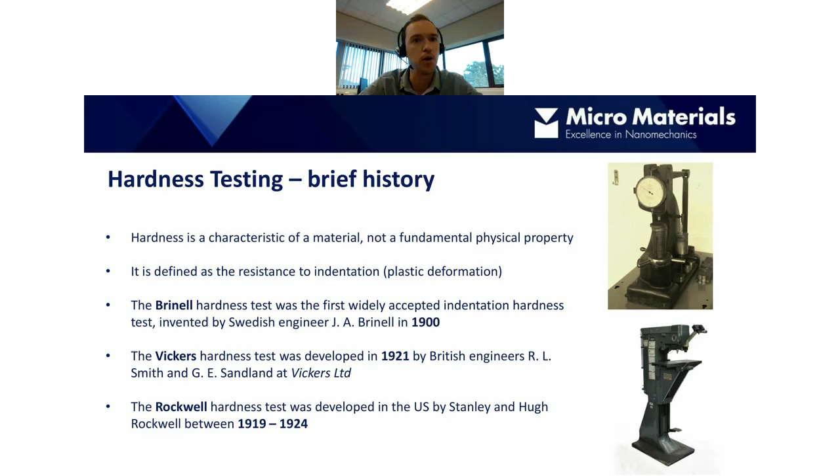Around the same time, the Rockwell hardness test was developed in the United States by Stanley and Hugh Rockwell, who apparently were not related, coincidentally. This test was also developed around the early 1920s.

Let's look in a bit more detail at some of these test techniques, and then we can compare them to modern day nano indentation.

With Vickers indentation, step one is we apply a force through a Vickers indenter, which is a four-sided pyramidal indenter. The force is applied through the indenter into a test specimen, and we get an indentation into the sample. The indenter is pushed into the sample with a known load.

Usually this is between 1 and 100 kilogram force. In terms of newtons, we multiply by 9.8 to get the equivalent force in newtons, so it's roughly 10 to 1,000 newtons.

Step two is to measure the indent. After the indent has taken place, we use the optical microscope to measure the diagonals of the indentation - the two diagonals - and then the average is determined. From that, we can get the surface area of the indentation. Quite simply, the Vickers hardness value is the force divided by the area, which gives us an HV value.

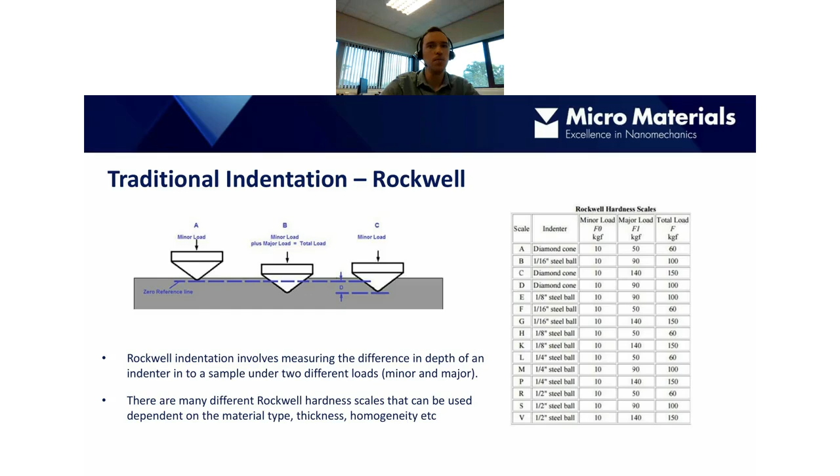All these traditional test techniques, such as Vickers, Brinell, and Rockwell, use very high loads - between 10 and thousands of newtons. The Brinell test is usually 3,000 kilogram force, so 30 kilonewtons, applied through a 10 millimeter diameter tungsten carbide ball. These are very high loads, so we cannot test very small volumes of material, especially thin films and coatings, with these test techniques.

They also do not provide a continuous record of load and depth during the indentation. They're essentially designed to make a big hole, a big indentation into the material, so we don't get a record of depth as the indent progresses. Of course, they only provide a measure of hardness, so we can't really get any other information such as modulus or any time-dependent behavior.

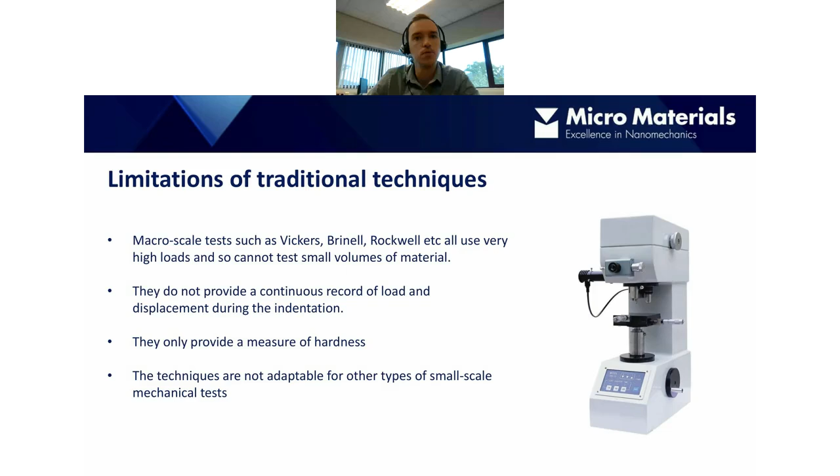And these traditional techniques are not particularly adaptable for other types of small-scale mechanical tests, which I'll describe a bit later on. So why do we use nanoindentation?

Well, the technique was developed in the 1980s to test thin films and coatings. There was an increasing need to characterize the mechanical properties of these coatings, which may be microns thick or even hundreds of nanometers thick. As we described with previous traditional test techniques, the high loads applied would immediately penetrate through any thin film or coating. So we need an indenter with a much smaller, more precise application of these small loads.

So when we're testing coatings in nanoindentation, there's a very general rule you may have heard of. It's called the 10% rule, which means in order to avoid influence from the substrate, the indentation depth should be no more than 10% of the coating thickness. So if we have a 1 micron thick coating, the indentation depth should be no more than 100 nanometers. Obviously that small depth of indentation is not possible with the more traditional test techniques. That rule works quite well for hardness, but it's less applicable to modulus, for reasons we'll discuss later on.

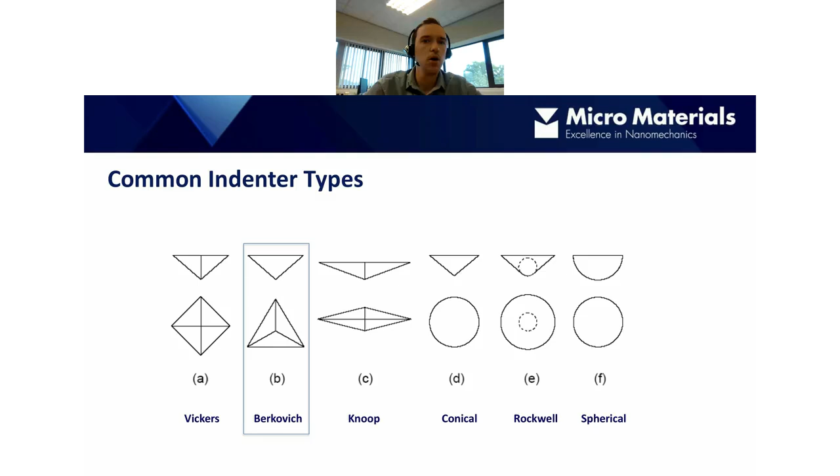So the Berkovich indenter is most commonly used for nanoindentation. It was designed from the outset to have the same ratio of contact area to indentation depth as a Vickers indenter - the geometry, the face angles, were designed to have this equal ratio with the Vickers indenter. Incidentally, it was named after the Russian scientist who devised the geometry, called Berkovich. The reason it's a three-sided rather than a four-sided pyramid is because it's simply easier to grind the diamond to a fine point with three sides compared to four.

If you have a four-sided pyramid, it's hard to get this precise, very sharp tip of the indenter, which is of course very important for nanoindentation testing because some of the indentation depths are very, very small. So the precise geometry of the tip is very important in order to get accurate mechanical property measurements.

Of course, it's not infinitely sharp, not perfectly pointed at the very tip of the indenter. What we usually see is the tip of the indenter is effectively like a small sphere, of radius typically between 20 and 100 nanometers. If it's a brand new indenter, it may be around 20 to 40 nanometers, and then over time that tip will start to round and the effective radius will increase.

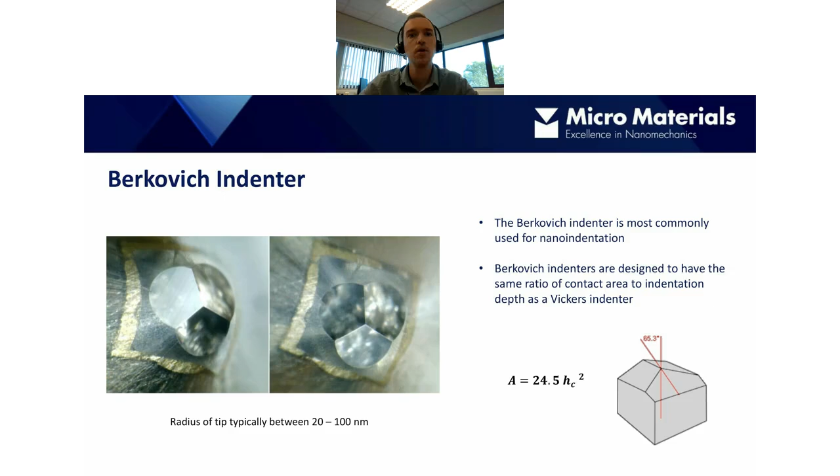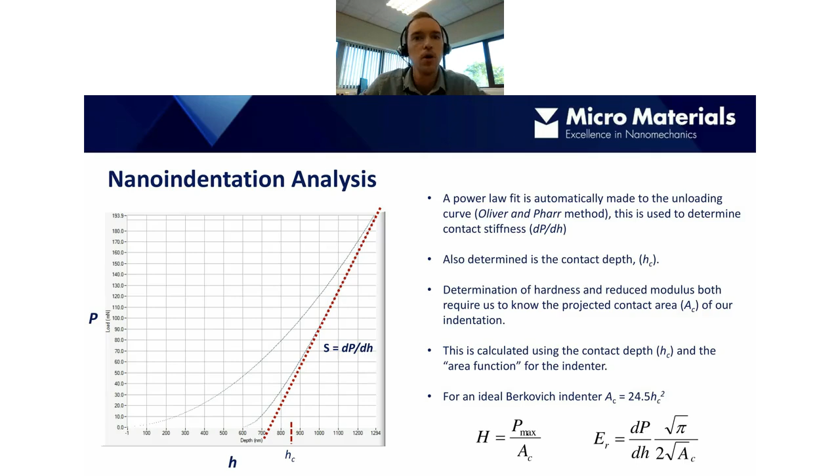In some cases that may be known, in others it may need to be more of an estimate. But from this we can work out the elastic modulus from the reduced modulus, and the software that we provide, the nanotest software, has a function, or a calculator, to convert that for you. In most cases, for low modulus materials, there won't be much difference between the reduced modulus and the elastic modulus.

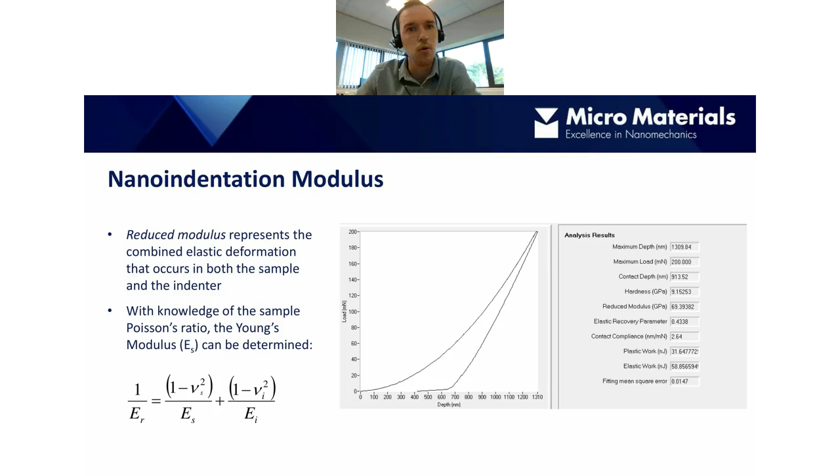We can also, with a nano indenter, detect small changes in the structure of certain materials. For example, if we perform a nano indentation into silicon, we often see small steps in the curve, which are pressure induced phase changes. These can be on the order of 5 or 10 nanometers in magnitude. It really does require a very precise and sensitive nano indenter to detect these features.

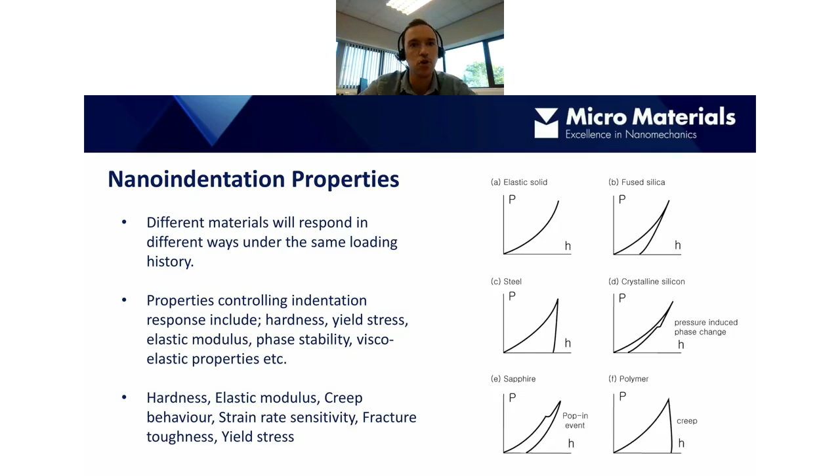We can also obtain plastic and elastic work from the indentation. The area underneath the unloading curve represents the elastic work done by the indenter, and the area enclosed by the loading and unloading curve is the plastic work.

There are a few indexes, such as plasticity index, which is the plastic work divided by the total work, and also the hardness to modulus ratio, simply the hardness divided by the modulus. We can use these indexes or parameters as a useful prediction in terms of tribological behavior from indentation data. My colleague Adrian might talk more about that later on.

Factors that affect nano indentation data are numerous, and I've split them up into 4 general categories - these are just the more common ones. First, we have the environment: vibration, mechanical or acoustic, can affect nano indentation data, as can thermal drift, which is the thermal stability of the instrument. In terms of the instrument itself, frame stiffness or compliance, and indenter geometry.

These are important factors to ensure that we get accurate and reliable mechanical data. Sample preparation - sample mounting, surface roughness - these can affect the data quite a lot. And also properties of the sample itself, so things like indentation size effects, pile up and sink in, and residual stresses. We'll look at these in a bit more detail.

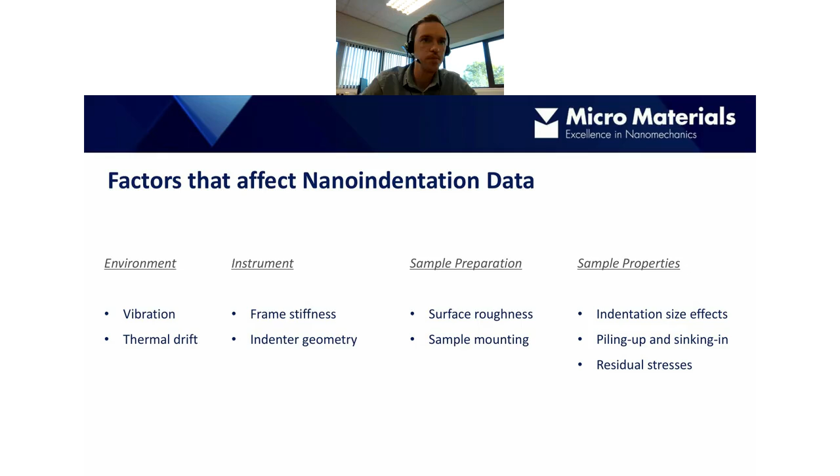First of all, we go back to the environmental considerations. Thermal drift is essentially a change in the dimensions of the instrument due to thermal expansion or contraction of the instrument itself. If the nano indenter is situated in a location where there isn't really any temperature control, we will often see what's called thermal drift on our measurements, which is essentially a change in depth imposed on the indentation data due to this contraction or expansion. Basically, it's an error which we need to try to eliminate or minimize as best we can.

Generally speaking, most nano indenters are housed within some sort of chamber or cabinet. You can see here, this is the NanoTest Vantage, the nano indenter that we make here at Micro Materials, and you can see it's housed in this cabinet. These cabinets can be temperature controlled. For the Nanotest system, if the lab itself is kept temperature constant within 1 or 2 degrees Celsius, then normally we have very, very low rates of thermal drift, so we don't need to worry too much about it.

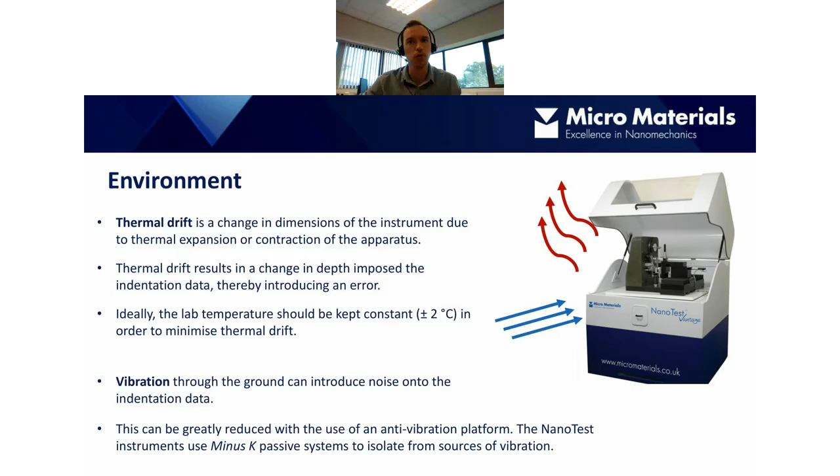It's very important that the frame stiffness value is accurately determined, especially for high modulus materials such as tungsten, because if there's any inaccuracy, it will significantly affect the reliability of the modulus values.

For Nanotest systems, the displacement is directly proportional to the load, which is why we get this straight line, meaning we can use a single value for the frame stiffness across the whole load range. We can do an experiment whereby we perform a range of different loads on the tungsten, and when we analyze the data, we get the correct modulus values across the load range.

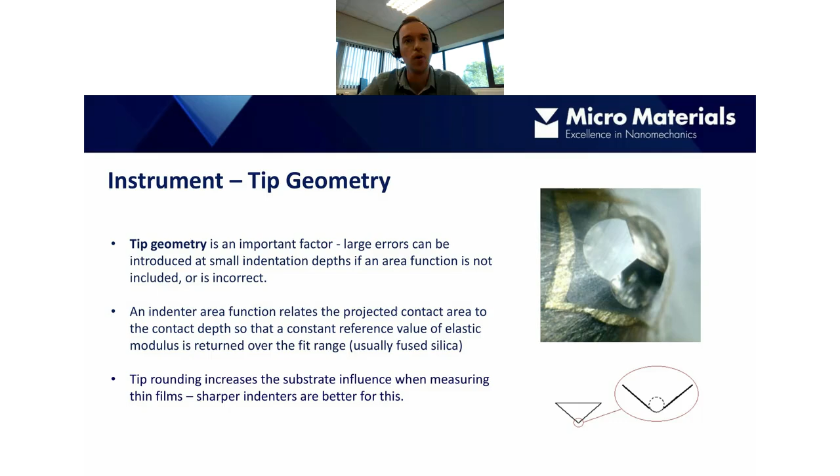Moving on to sample preparation. Surface roughness is a common source of worry - generally speaking, the lower the roughness, the better. When we indent a material with relatively high surface roughness, we tend to see more scatter, more variable indentation curves, and larger standard deviations, or bigger variability in hardness and modulus. If this is the case, in practice we would take more measurements to get a better statistical average. Polishing the samples is preferable as well if possible, although occasionally the act of polishing may change the mechanical properties itself, so it's not always desirable to do that.

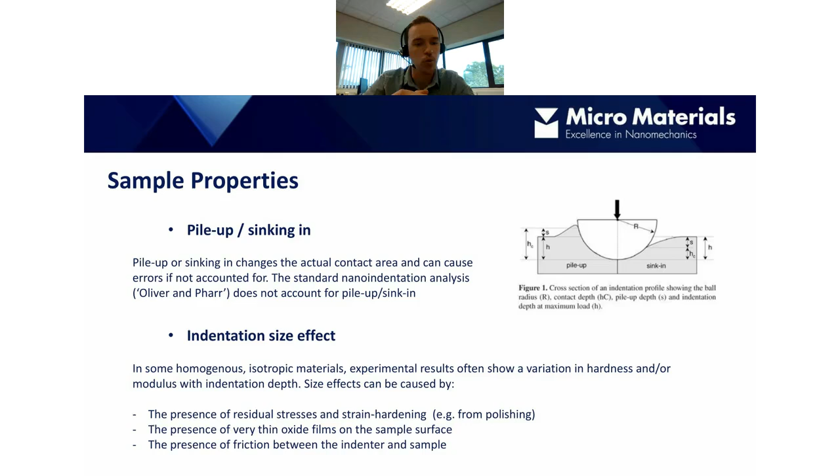There's also indentation size effect. In some materials, we often see an increase in hardness near the surface, which is not due to any errors in indenter geometry or calibration. This can be due to a number of factors, such as the presence of residual stresses, strain hardening from polishing, the presence of a very thin oxide film on the sample surface, or even friction between the indenter and the sample. So as you can see, there are a lot of factors we need to consider when performing nanoindentation.

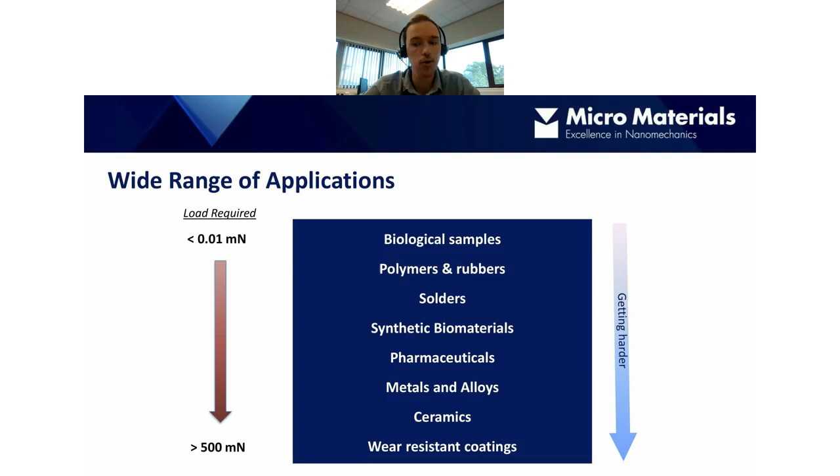In order to accurately measure materials of this hardness and high stiffness, it's important that we have a stable and precisely calibrated instrument. As I mentioned briefly in the section on frame stiffness, any slight error or inaccuracy in the frame stiffness determination will give us large errors in the modulus values. Of course, when indenting materials as hard as this, we need to watch out for indenter wear, especially with samples like this that are very hard and quite rough, such as these synthetic diamond coatings. It can be a bit of an indenter graveyard.

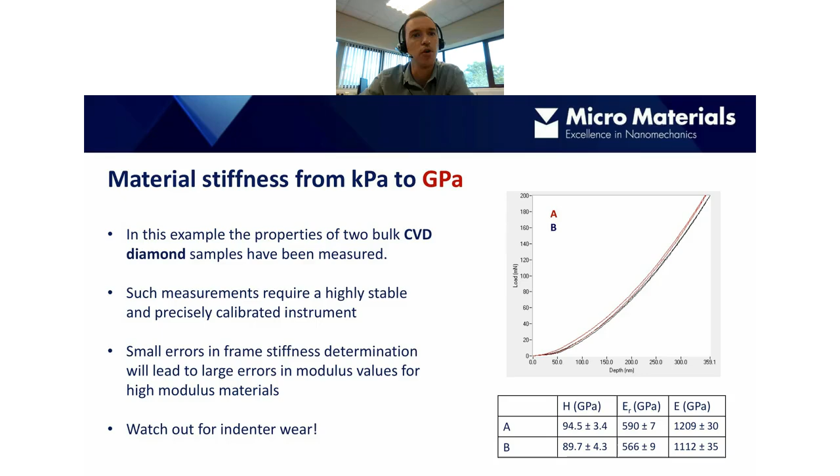Another common application of nanoindentation is to measure mechanical properties as a function of depth. This is particularly useful for coated samples, thin films and coatings. There are different ways we can do this. Often it's done with a load oscillation technique, but it can also be done with a standard quasi-static technique, such as the one you can see here.

This is what we call a multiple load cycle test, whereby we perform an indentation with increasing load steps. The load increases, then we have a partial unload period, and then the load increases onto the next step. This is a single indent in one position on the sample, but with these multiple unload steps. We can use the standard Oliver and Pharr analysis to get a value for hardness or modulus for each of these unloading steps, and then plot that as a function of depth into the sample.

In this example, we have a 2 micron thick titanium nitride coating on a silicon substrate, and we can see the hardness here. We have a peak hardness of around 18 gigapascals in this region.

As the load increases and the depth increases, we get an increasing influence from the silicon substrate, and the hardness then decreases and essentially just tends towards the hardness of the silicon itself.

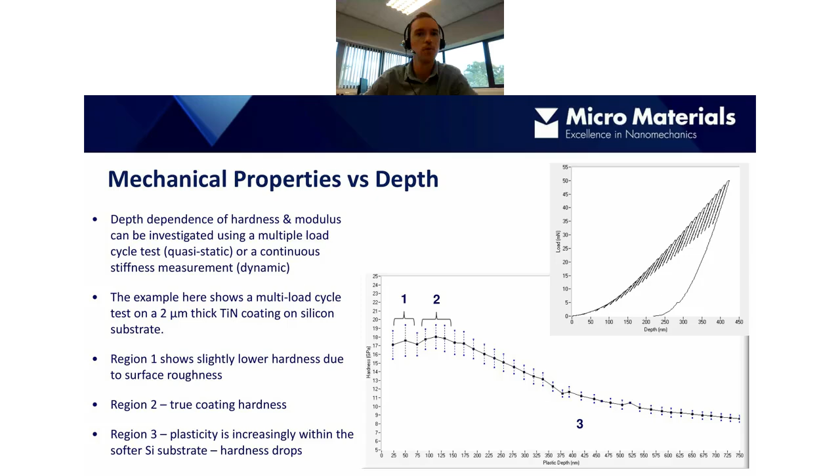Mechanical property mapping is another common application. This is where we perform a large number of indents very quickly over a given area of the sample. The area is typically tens of microns.

That's a useful way of visualizing the variation in mechanical properties graphically. Okay, so creep and viscoelasticity.

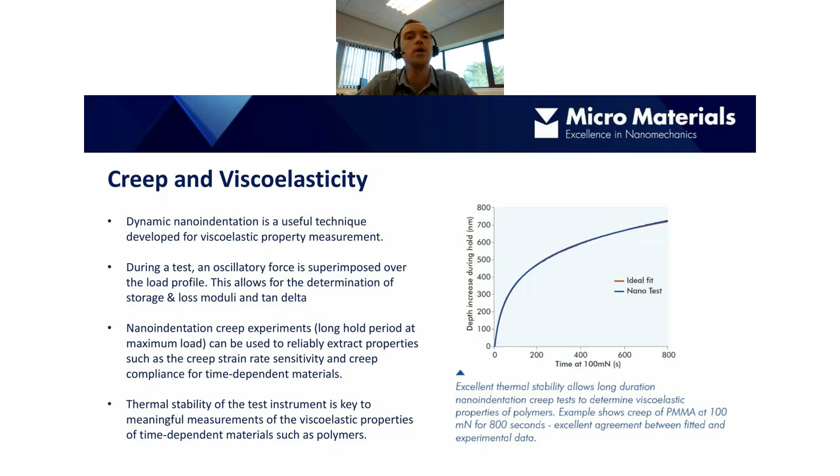So it's important, especially for these types of tests, that we have a system and an environment that is thermally stable.

That brings me to the end of my part of the seminar. So just in summary, what we've looked at today is the difference between nanoindentation and some of the more traditional techniques, macro scale hardness tests such as Vickers and Rockwell, and how we can get a great deal more information from nanoindentation than we can from traditional indentation.

So nanoindenters are designed to study mechanical properties of all different types of materials. We've had a quick look at examples from very low stiffness materials right up to very, very hard diamond coatings.

And also nanoindentation has been used for a wide variety of applications. We've only looked at a very small number of some of the more common applications, such as depth profiling and mechanical property mapping. But nanoindenters can also be used to perform more novel techniques, such as micro pillar compression or micro cantilever bending, which again use the fact that we can have this precise positioning of the system as well as the precise load application and displacement measurement.

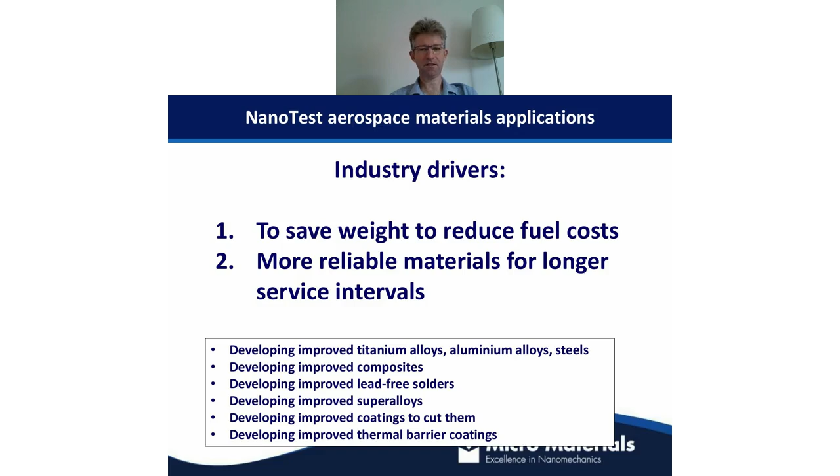One area where this technique is getting an increasing amount of different applications is the aerospace sector. There are lots of different industry drivers for that, of which perhaps the main two are to save weight, reduce fuel costs and environmental impact of flying, reduce CO2 emissions, and also to develop more reliable materials in jet engines that allow us to go for longer between services, improving reliability. Pretty much anything on the aeroplane has been tested by nanomechanical testing.

So some examples from the aerospace sector and elsewhere are shown here. We're talking a little bit about using grids of indentations, using the automated ability to position in a single setup. The instrumentation does all the indentations in either specific targeted positions, or in this case in grids.

On the left we can see an intermetallic compound in an automotive aluminium alloy, and that's showing essentially that it's much stiffer than the surrounding aluminium matrix.

In the middle at the top is a titanium 6-4, which is a very typical material in the aerospace and biomedical fields. When you look at this at small scale, you can start to see that the complex microstructure in this material actually gives it different mechanical property phases. So here you're getting one region where it's lower hardness, and here it's getting higher hardness regions. This is down to the differences in the crystallography of the individual regions you're testing.

Solder joints are particularly important because they can be brittle, and this can lead to reliability problems. So this is a mechanical property map of lots of finely spaced indentations, and you can see that the region in the vicinity of this joint is much higher hardness. The red is the higher hardness, and actually you can see that it has led to a reliability issue because it's actually cracked after testing.

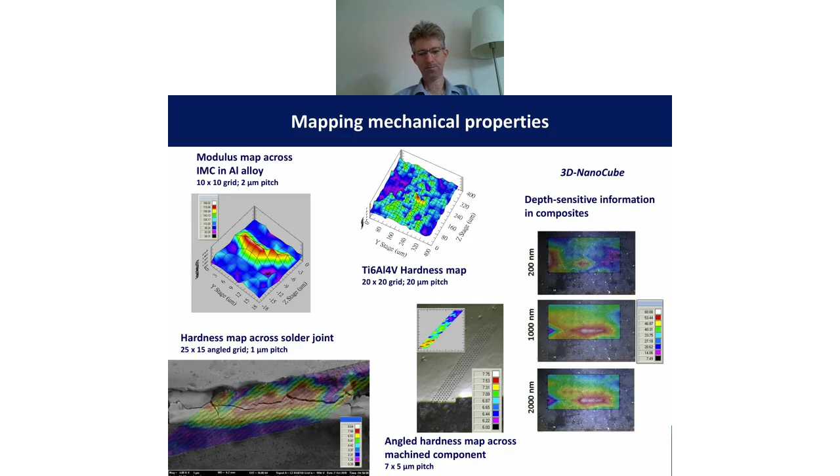As well as these grid indentation experiments, we can also target specific features of interest on our material. We can, for example, accurately place to really a couple of nanometers precision. In this example, this is from MIT, and this is actually nearly 19 years old now. So we've had this precision, and we've been a leader in this industry for a long time.

You can see how we can target and put these indentations right in the middle of these gold patterned lines on a silicon substrate for a MEMS application.

On the right, again, from a sort of aerospace application, we can target and position indentations in the middle of carbon fibers. This one here is for the automotive industry, and this was as part of a study illustrating you can put big indentations to understand these big phases, and then combine that with much smaller grid indentations to look at the mechanical properties of these smaller phases.

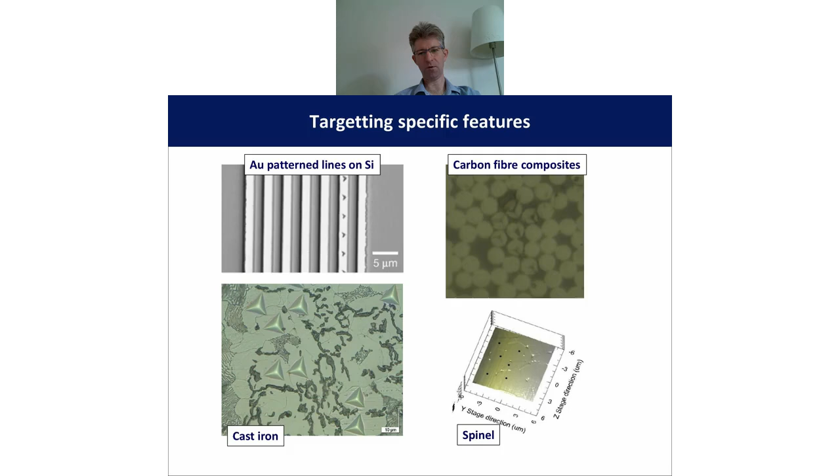And this one is a biomedical alloy, again, where you can position automatically and get different phases in the spinel.

Andy alluded right at the end of his talk that, as well as an indentation test, there's lots of other things you can do to take advantage of the fact you have this very precise control on the load you apply, the displacements you measure, and the position accuracy at which you do the test. Some of these are shown here in examples from the universities of Cambridge, Berkeley and Oxford.

What they've done here, for example, is used a focused ion beam to mill out a pillar of a material of interest, and then they've squashed that pillar with a flat punch. Again, this is another way to get out yield stress information from the test.

They've also machined out cantilevers in this work from Oxford, and then we push on the end of those cantilevers with a Berkovich indenter. At some point you get some elastic property information, you may also get some yield, some plasticity, and you may also get some cracking near the root of the cantilever. So again, this is all useful information, allowing people to pull out phase-sensitive mechanical property information.

And this is from a composite, where these fibers have been pushed from the other side of the material. This is just a false color image they put in to try and win a prize for the prettiest image, but there was some serious science behind it as well.

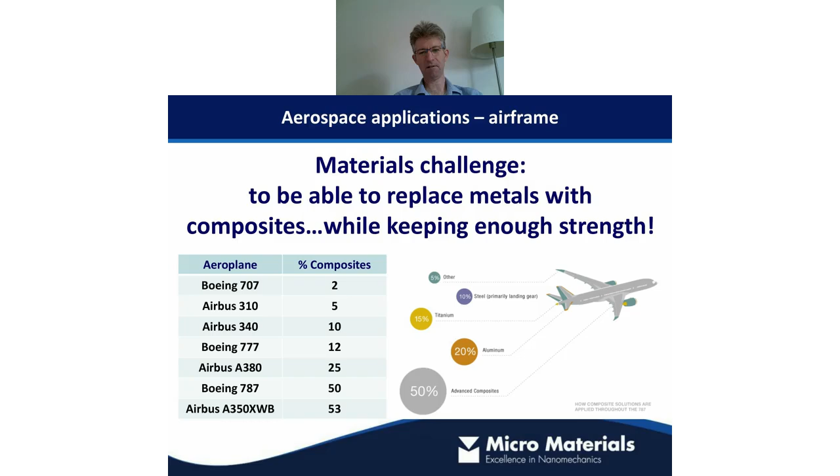So the challenge is in combining weight saving whilst retaining sufficient strength and safety in the material. One of the things that controls the safety of carbon fiber composite materials is their structural integrity, and to achieve that you really need very strong bonding between the fibers and the surrounding matrix.

We have tested this, or our customers have tested this, using flat punch indenters instead of sharp indenters, typically with a flat end of around 5 or 10 microns. They take specially thin samples, accurately use the nanotest to target the middle of one of these fibers, and then push it down. As they push, at some point the friction and the strength of the bonding is overcome and the fiber is essentially pushed out into the material. If you look at the back side, you can see the fiber sitting up. They can do this for different adhesion strategies for the fiber and pick the best bonding for the application.

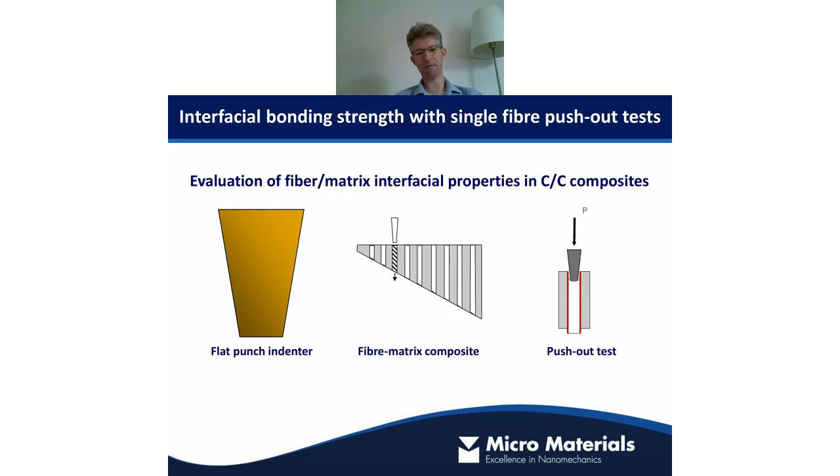Moving on now to the influence of the test environment on mechanical properties. I'll start off by showing this graph, with 4 indentation curves, all different colors, all on the same material, and that material is very homogeneous mechanically — if you test at different positions you get exactly the same results. So nevertheless, we're getting this big spread in behavior. What is going on?

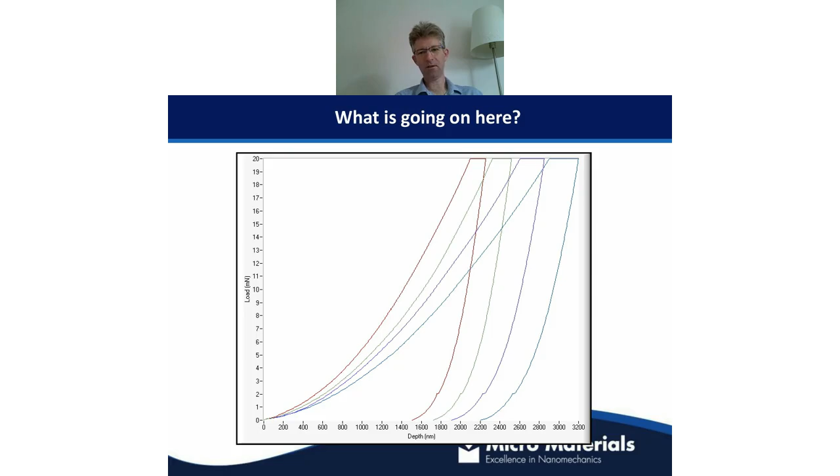What's actually happened is that the customer has changed the test environment between doing those different tests — they've changed the humidity. The relative humidity has been changed from 85%, shown in the blue curve, to 70 in this curve, then to 30, and then right down to the lowest humidity, very, very dry at 10%, for the red curve.

They've done that with this little humidity chamber here, which my colleague Adrian designed. It works very, very nicely. It just sits in the nanotest system, and it allows us to very rapidly control that test environment, so rapidly change the...

...humidity in the environment and then do tests rapidly. In this case, as the test has gone from dry and then moisture's gone in, we can track how that material, nylon in this case, because it's hygroscopic and very sensitive to the ingress of small water and organic molecules, responds. Essentially it's plasticized by that, and it gets less hard and less stiff. You can see in the graph how its stiffness decreases as a function of increasing humidity.

You can see how users then moved to develop a new improved material by putting a clay into that material, intercalating a clay, which increases the stiffness. But that relative stiffness enhancement is not constant across the humidity range - the enhancement is much better in the composite material at high humidity. This is very useful for applications where nylon might be susceptible to moist environments and suffering from not enough structural integrity. It shows there's a real benefit in making the composite with 10% weight of clay in there.

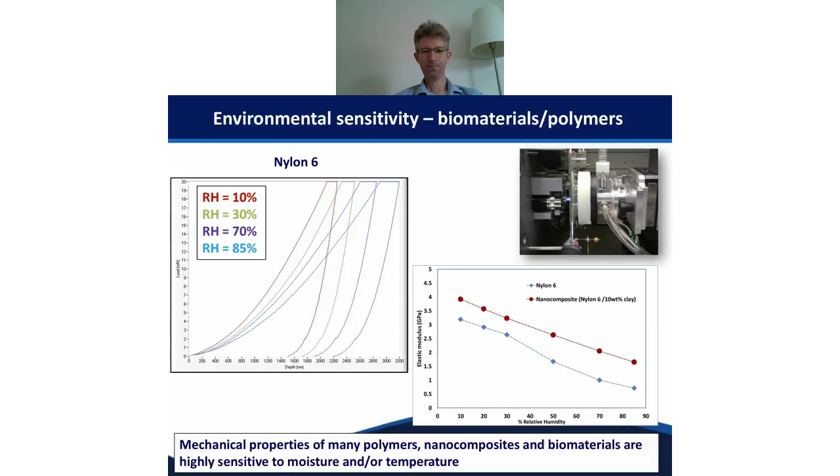Okay, so moving on to the next subtopic: now we're going to look at strain rate, and we look at that through nano impact testing.

In a nano impact test, essentially, in comparison to an indentation test which is a quasi-static test, in an impact test we now have a dynamic test. So instead of the load being applied very slowly, we apply it very rapidly, and we can achieve strain rates of about 1,000 per second, compared to a normal quasi-static indentation where you'd typically be at about 10 to the -2 per second - many orders of magnitude higher.

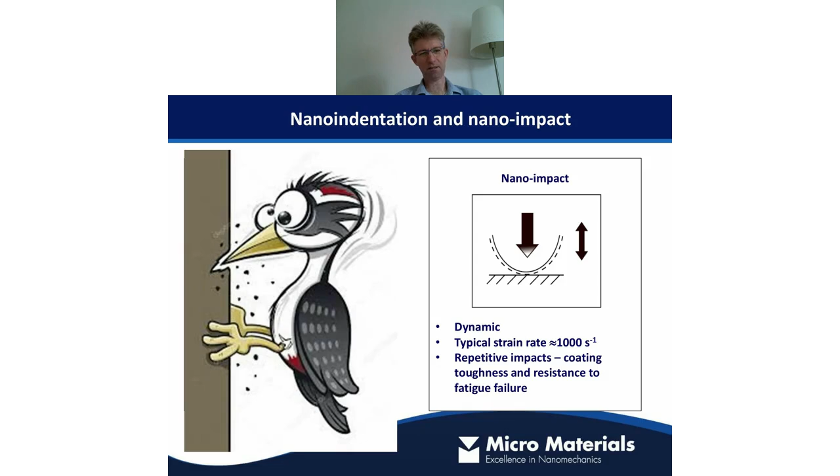This allows you to look at high strain rate properties such as hardness, but it also allows you to do the test repetitively, and that lets you look at fatigue aspects - coating toughness and resistance to fatigue failure. You can go backwards and forwards, think of it like this poor guy here, tapping away at that material until we get some material removal.

Our customer at the University of Oxford developed a new nanoparticulate coating, which was softer, but much less susceptible to this brittle fracture mode. This shows you can really use this type of technology to design better materials for extreme environments.

Brittle systems are typically hard, so they're used in a range of applications, but they have this intrinsic low toughness. Schematically, you can think of a high strain rate contact or impact coming into a brittle material and causing a range of deformation mechanisms, including some plasticity but also a range of cracking. That's just on a single impact. If you have multiple impacts, these crack systems superimpose, and you get large amounts of material removal, leading to erosive wear.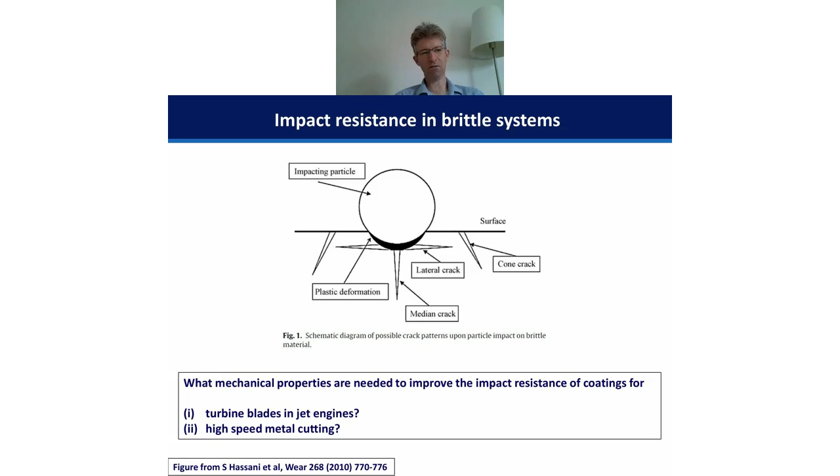The nano impact test has been used for a range of different applications. I'll talk about a couple here: one is optimizing or understanding how turbine blades in jet engines are affected by thermal aging. Another is how we can use it to design coatings which have better life in high-speed metal cutting applications, because that's one of the big advantages - if you have a coating that's more durable, you can run it for longer, with improved productivity and run it faster.

That's the real challenge. In a jet engine, a thermal barrier coating is the key system that enables you to operate the engine above the melting temperature of the nickel-based superalloy, which is the turbine blade material. It's quite unusual - by a combination of this thermal barrier system and advanced cooling, every time you get in an aeroplane, the temperatures in that engine are higher than the melting temperature of the alloys in the engine. Yet it still works very nicely because of this clever composite coating system that allows us to drop several hundred degrees across this zirconia top coat.

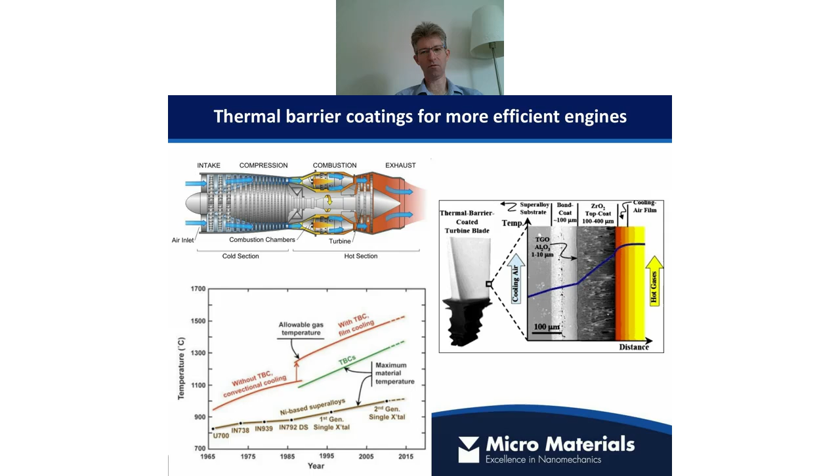So this one shows a more detailed example of one of these systems. But the downside is that in the engine, these thermal barrier coatings that protect the turbine blades are susceptible to a certain amount of particulate erosion, be it sand particles typically. That can be worse in dusty environments, but equally even in other environments there can be sand in the engine that gets ingested. Eventually it can lead to dimensional changes in the blade, and under some cases it can even be life limiting, essentially. So you can have an engine failure, and that obviously can have catastrophic consequences.

So the manufacturers of these coatings really want to try and optimize their thermal properties with their erosion performance. And in a jet engine, obviously these things are susceptible to very high temperatures. They're in a very high temperature environment.

So this is not a nano impact test result. This is an example from Rolls-Royce, where they're looking at individual erosion tests. They're looking at doing an erosion test and taking the coated part out and measuring it and putting it back in and continuing the erosion test. So it's a very time-consuming process.

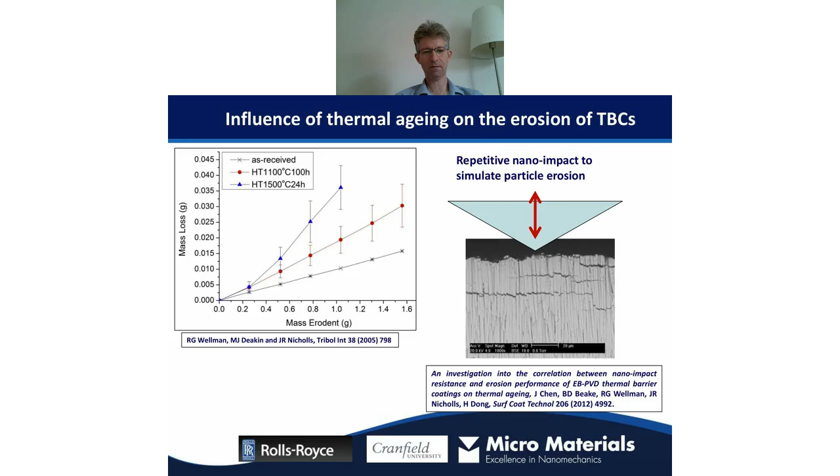So we can simulate this erosion test really quite simply by using the repetitive nano impact test. We typically hit at the same position on the surface. We can cause the cracks, and we can follow that deformation behavior. So here is an example of how it's working.

So here we have 3 different impact test results. You can see the tests are really quick, only a matter of, in this case, 3 minutes. And we get exactly the same ranking of wear rate that we do in the much longer erosion tests.

And if we look at the microstructure, we can actually see what's happening is that when the material has been thermally aged, this columnar structure, which provides some strain tolerance, is starting to sinter together. That sintering across the columns is decreasing the strain tolerance such that when it's impacted or eroded, material from many columns can be removed. But when it's not thermally aged, essentially that damage remains within one column. So there are big disadvantages in this case for thermally aging.

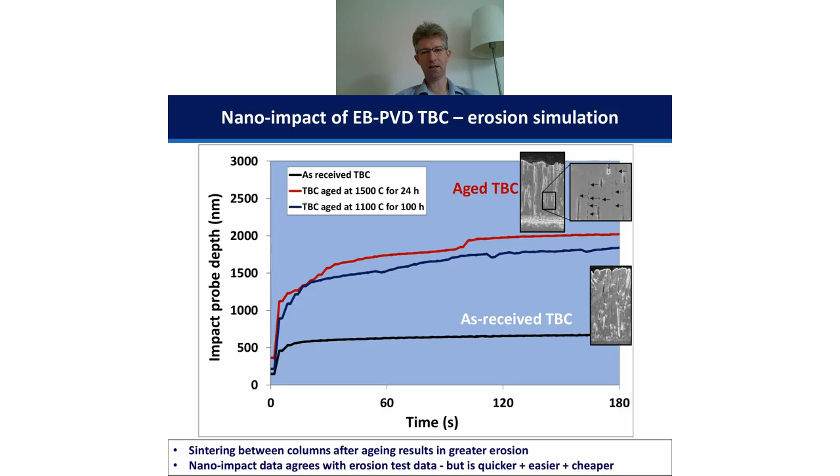But this is just here to show the advantages of the nanotest and how to optimize this sort of performance.

So the other key application area for the impact test is in simulating metal cutting applications. Here's an example from the literature from one of our customers a few years ago. And what they've shown here is a very clear correlation between the number of cuts until the tool failed and the performance in the nano impact test.

So essentially, when there's a very high depth at the end of the impact test, that's because the coating has fractured, and this is again correlating to a large degree of coating fracture in the actual test, which is leading to a very limited amount of tool life before it fails. Conversely, you can get a lot more life out of the material that doesn't fracture in the impact test.

So if we now look and say, well, what is behind this trend? What we can see here is how our customers managed to optimize their coatings, in this case by tinkering with the microstructure.

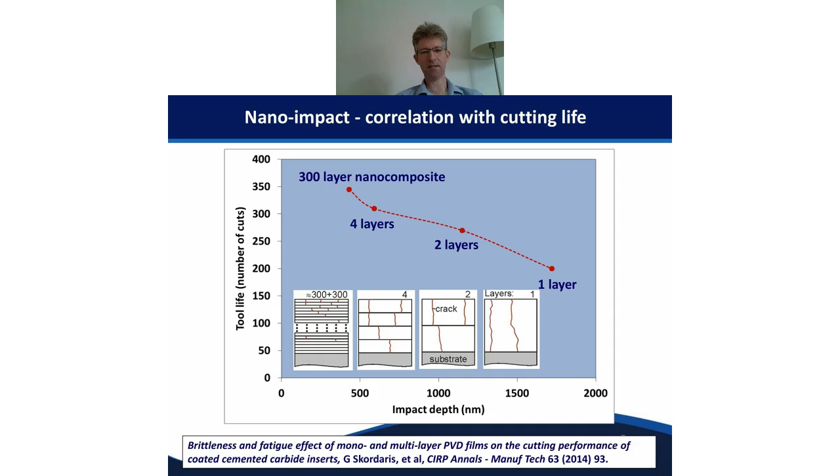So they're putting extra layers in, and these extra layers are acting as stopping through-thickness crack propagation. So the cracks are coming in, but then they're getting deflected perpendicular to the stresses, and this is minimizing the amount of wear that's occurring. So it's localizing the fracture, and it's minimizing the amount of through-thickness cracking.

So another example here, again comparing two different cutting tools. On the left is the cutting tool test, and on the right is the impact test. What we can see is that this titanium aluminium nitride coating starts off about the same as the other coating, but rapidly starts to fail more quickly. This aluminium chromium nitride shows a much longer fatigue period.

But with these cutting tests, you had to stop and test these things each time, put them back in the same position, and start again. So it's a very time-consuming test. If we look on the right, we can see the impact test, and in a minute and a half we get exactly the same trend, very consistent behavior. This just shows one test, but you can do it several times and get very consistent results.

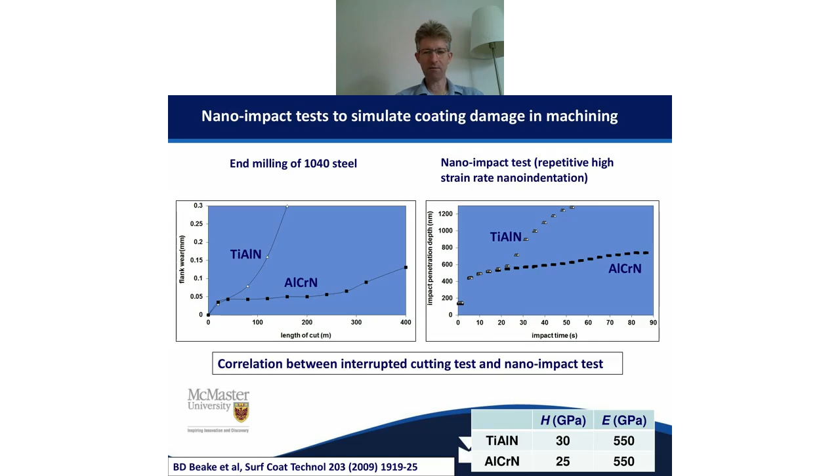Again, it shows this material is the best, and in this case it wasn't the harder of the two materials, so you can't necessarily rely on mechanical properties alone to predict performance. It's much better to be able to simulate the test directly.

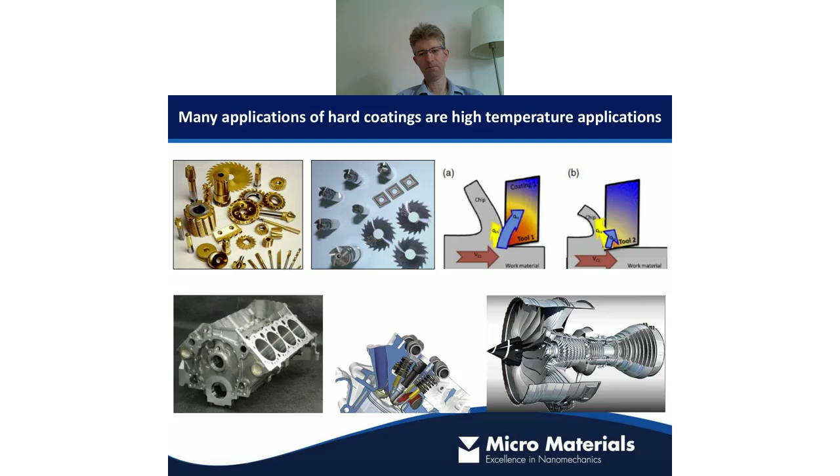So in the last part of my talk, I'm going to be talking about the influence of high temperature. Sticking with hard coatings, many applications of hard coatings and wear resistant coatings, when you think about it, really are high temperature applications, be they in metal cutting, machining engine blocks, or aerospace applications.

So when we think about coating design for wear resistance, we typically think about wanting to combine hardness and toughness in materials, particularly in coating systems. But what we really need to be thinking about is combining high temperature hardness and toughness.

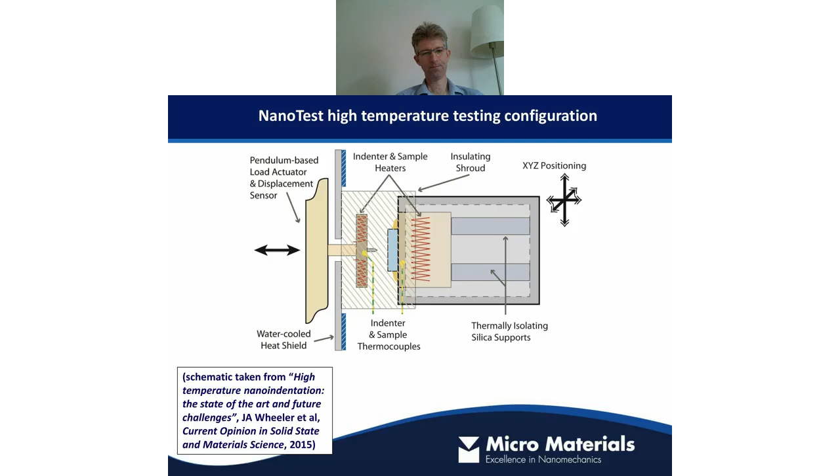This has been used by large numbers of customers around the world. Here's some work from Berkeley looking at how hardness as a function of temperature decreases, even in quite hard materials. In this case, this alpha alumina stays harder than this kappa alumina throughout the temperature range used at Berkeley.

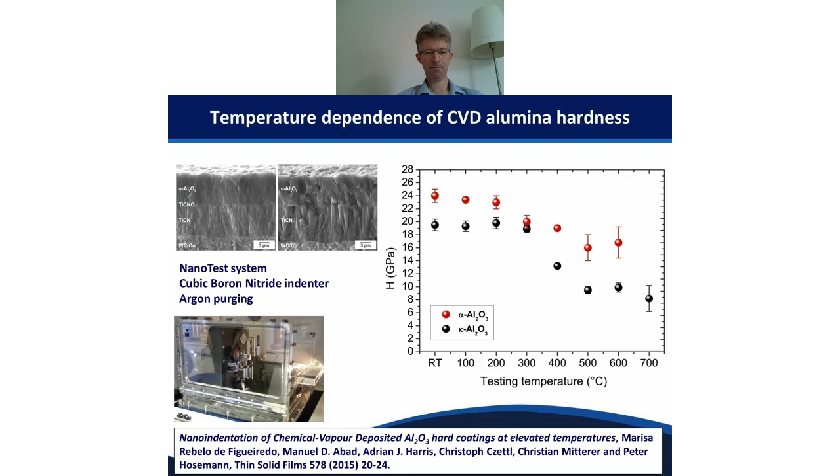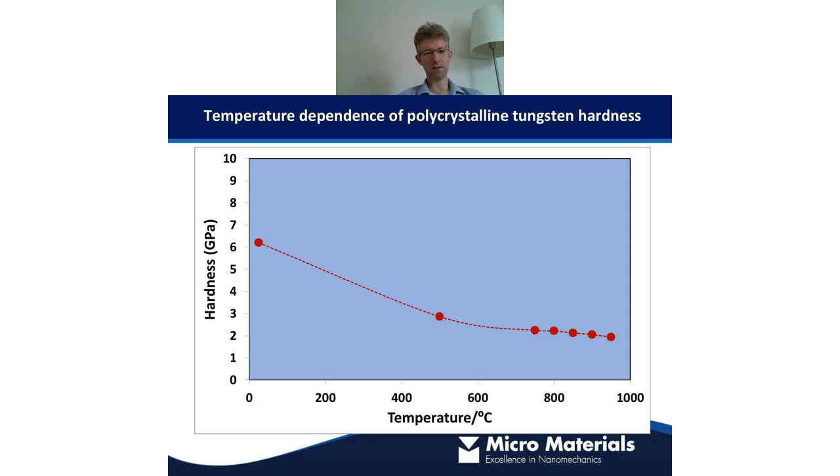As you go to higher temperature on these systems, you get a more increasing time-dependent deformation. This shows what happens during a 30-second hold at different temperatures from 750 to 950. We can see there's progressively more creep at higher temperature.

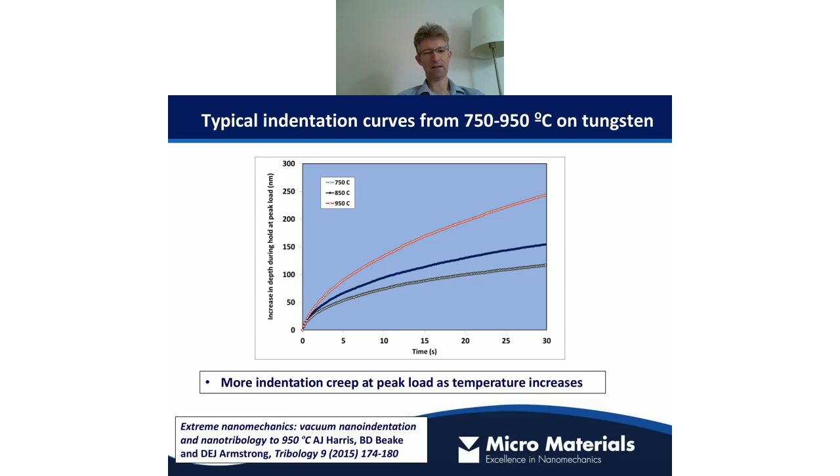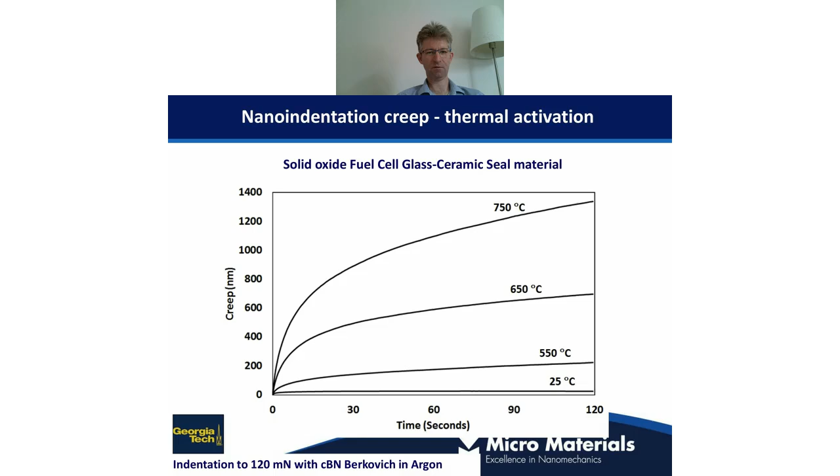We've also seen this in our standard Vantage systems. In this case, we're using a cubic boron nitride indenter and an argon purging environment to restrict sample oxidation, and also to work above the oxidation temperature of 500 degrees for diamond. This is looking at a solid oxide fuel cell material, and what we can see is that it doesn't creep at all at 25 degrees. It doesn't creep much at 550, but over that range it dramatically improves and increases its creep. So this restricts its performance.

This is a similar sort of thing, now looking at higher temperature work on a bond coat from a thermal barrier system. We looked earlier at the thermal barrier coating system, and I talked about how we were able to protect this nickel-based superalloy substrate from very high temperatures. In between the two things, we have a bond coat system to ensure decent bonding. This M-CrAlY bond coat's mechanical properties also need to be optimized at high temperature.

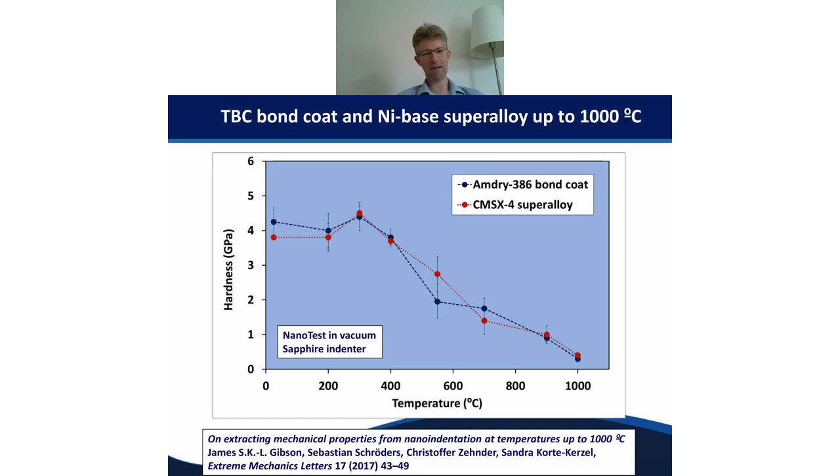You can pull out mechanical properties as a function of temperature on these things. As I say, the hardness stays reasonably constant and then drops dramatically. You can see this bond coat particularly is dropping more rapidly here than the superalloy, and this is the sort of thing people need to understand to optimize their material behavior.

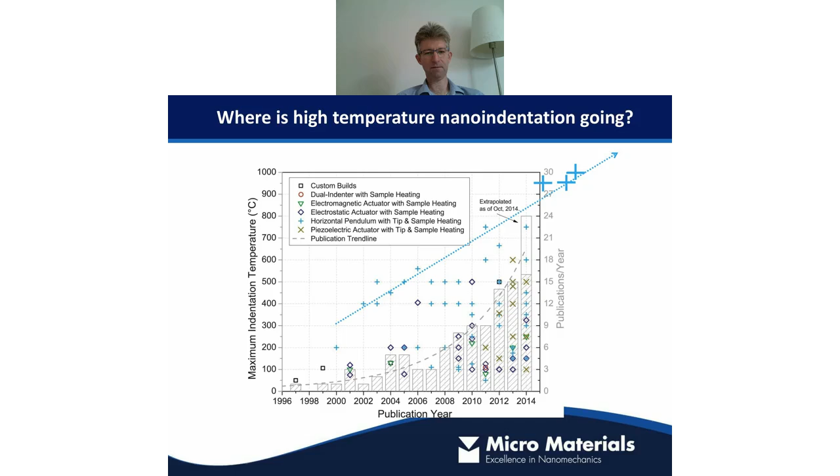So just to sum up, hopefully I've given you an idea about how to reinforce Andy's message about nanomechanical testing being a very reliable technique to characterize the mechanical properties of advanced materials, how we can look at that at very small scales and really get out properties that are sensitive to individual phases.

It was described earlier about anisotropic materials in one of the questions. So we can pull out the different mechanical properties of the different crystallographic orientations, for example, just by indenting the different surfaces of those different crystals.

The main part of this talk was really to emphasize that material mechanical properties are sensitive to the test environment. So I gave three examples. Humidity, where we showed that the advantages of putting clay into these polymer nanocomposites was much more beneficial in high humidity environments. In impact testing, I showed how it was really a combination of mechanical properties and microstructural factors that control impact resistance in these advanced coating systems. And in high temperature testing, I showed how time-dependent deformation was increasingly important at higher temperatures.

Okay, thank you very much.

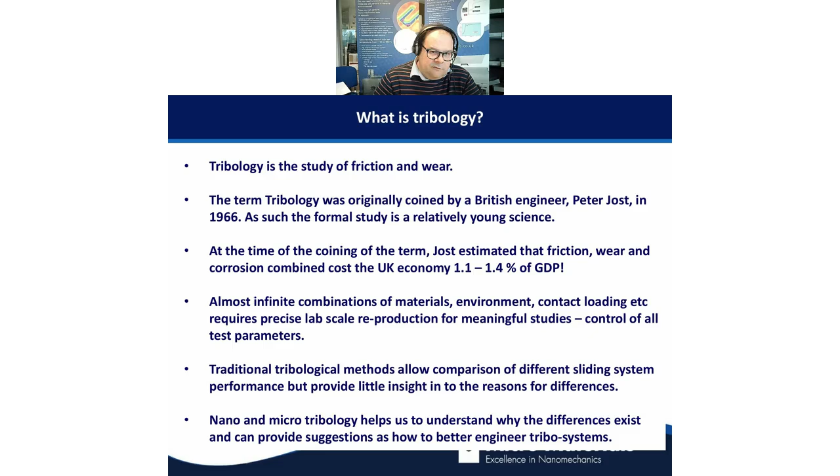Nano and micro tribology helps us do more highly specified tests to try to understand why one sliding system performs better than another, and gives the engineer something he or she can feed back into a development process.

Similarly to indentation testing, there's a drive to make things smaller, and this follows technology. Over the years we've seen the advent of things like CVD and PVD coatings, and measuring hardness and elastic modulus of those coatings has necessitated smaller scale testing. Traditional Vickers or micro hardness testing is no longer sufficient, so we've had to develop techniques at smaller length scales, where indentations are basically so small they're optically invisible, so we can keep deformation zones contained within our coating of interest.

Tribology follows a similar path. If we're using a macro scale pin-on-disc tribometer to study the tribological performance of a 100 nanometer thick amorphous carbon coating on a piece of silicon, we're probably not going to learn very much from that technique. So we need to develop new techniques more specific to the length scales our samples come from.

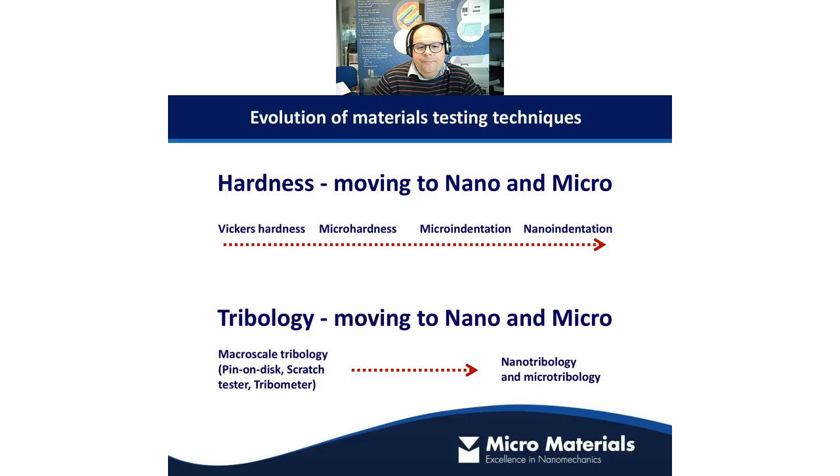So I'd like to introduce the concept of why we do nano and micro tribology. An important term to think about here is single asperity tribology. If we think about two surfaces sliding together, we can consider them as having a complete contact area, and say the contact pressure between those surfaces is merely the load pressing them together, divided by the nominal contact area.

But in reality, when we zoom in on the surface, we realize that nominal contact area is a gross overestimation of the actual contact area, because our contact actually comprises many thousands, millions in reality, of small asperity contacts. The contact pressure at those asperity contacts can be very, very high indeed, and it's damage occurring at those localized contact points which gives rise to frictional interaction between the surfaces, and also the onset of tribological failure.

So with nano and microscale tribology, we actually try to simulate what's happening at a single asperity contact. We use a small tip, and we don't necessarily use very high loads, because the tip radii available to us can be very, very small indeed—less than a micron radius.

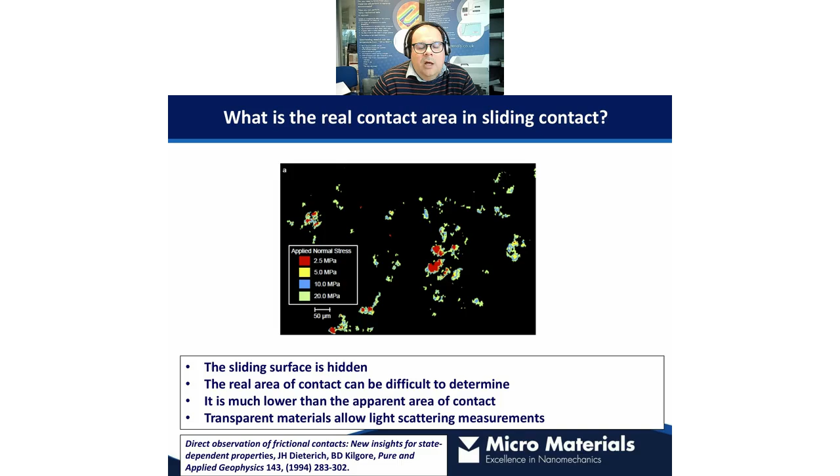You can see regions which are 2.5 megapascals plus, some regions much higher than that, going up to 20 megapascals. So these localized points, when they start to fail, lead to the onset of a tribological failure at a larger scale.

Just to put it into context, we can look at relatively large areas with traditional techniques, and here's an example. Let's think about an acetabular cup and ball type joint, a replacement hip joint. It's a pretty big ball, and nominally the pressure at the contact of the ball and the cup is pretty low.

But if there's any contamination in that joint, any kind of asperity type contact, then we will get localized damage, and that will seriously impinge on the lifetime of a joint.

They're designed to last between 1 and 2 decades, but in reality it's well publicized that we hear about many premature joint failures. The joint manufacturers work very hard to improve their technologies, but as soon as we start talking about bioimplantable devices and failure, it can become a very litigious area. So the pressures to further improve material performance are enormous.

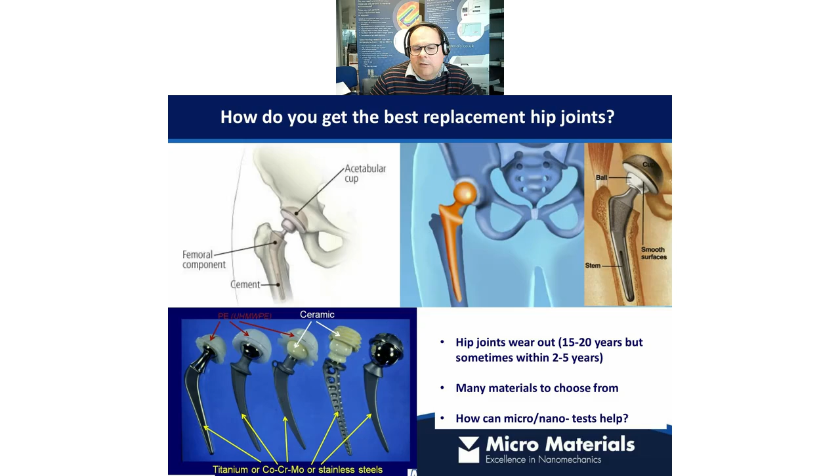So how can nano and micro testing help with this? If we take a look at an actual hip joint ball surface, you can see these scratches in the surface, with a 10 micron scale bar. We've got scratches in this surface from a recovered failed hip joint, which are at the scale of the types of scratch tests or wear tests we would perform using a nanoindenter or a nano scratch test device.

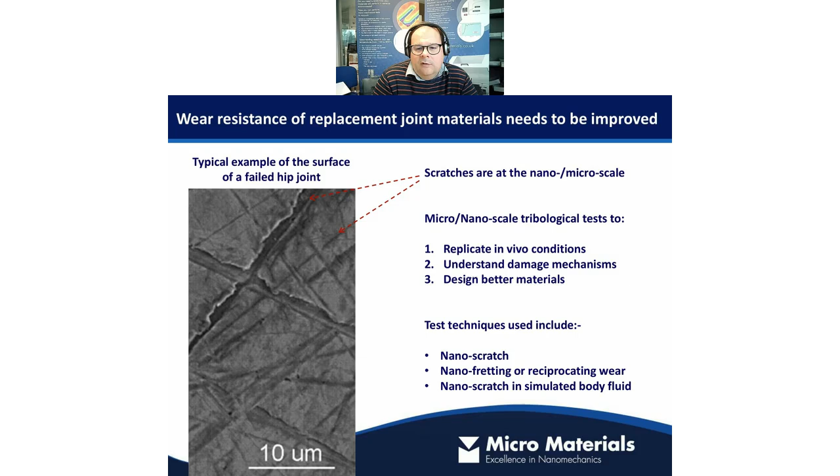The fact that we can produce in a controlled way damage scars of this kind of scale, and combine that technique with measurements of friction on the indenter tip, and combine it with environmental control to simulate the in vivo conditions the joint lives in, means we've got a pretty powerful tool for starting to simulate what may happen with different materials in the body environment, in that dynamic tribological environment.

The instrument we use for this work is the same one really that Ben and Andy have introduced for other applications earlier. It's a multifunctional tool called Nanotest Vantage, and you've already been introduced to the concept of instrumented indentation. I'm not sure whether impact and fatigue was introduced, but really this talk is focused on these areas here.

So nano and micro scratch and wear testing, nano fretting, an option called the nanotribometer test which we'll look at a little later, and the fact that we can combine it with these various environmental conditions. This multifunctional tool allows you to mechanically characterize materials in terms of fundamental mechanical properties, and also perform highly specialized studies to replicate application conditions from a tribological perspective.

So we have a range of techniques, as I mentioned on the previous slide: scratch and wear testing, fretting, and the tribometer test. So why do we have a range of techniques?

It's because they cover between them different types of contacts which can exist in the real world.

In nano scratch testing, the contact pressures tend to be very high. If we're talking about a coated system, we try to dimensionalize the test, meaning we select an appropriate tip or probe radius to get a maximum stress position close to the vicinity of the coating and substrate interface. Often in a tribological system you get detachment of the coating from the substrate, so the coating itself doesn't necessarily fail, and neither does the substrate, but the interface does. That's one of the major things scratch testing is interested in.

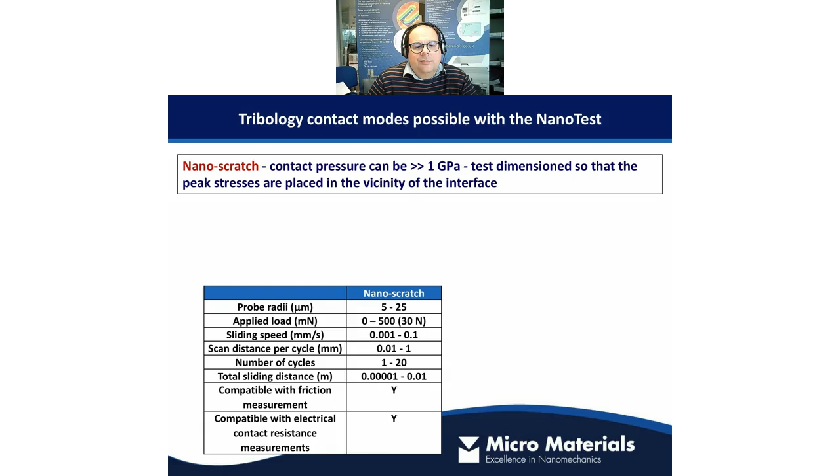Another technique is nano fretting. Fretting is a lower pressure test, still a small track length, but many cycles - where scratch testing was 1 to 20 cycles, fretting can involve 1,000 to 200,000 or more cycles, but with a small amplitude, up to about 20 microns. This is a reciprocating wear test - the probe slides backwards and forwards rapidly, at high frequency, over the same track length, simulating a different type of real world contact scenario.

So it's not an overload test like ramp load scratch testing, where you load up until you get a failure. It's a subcritical loading, more of a wear and fatigue type test.

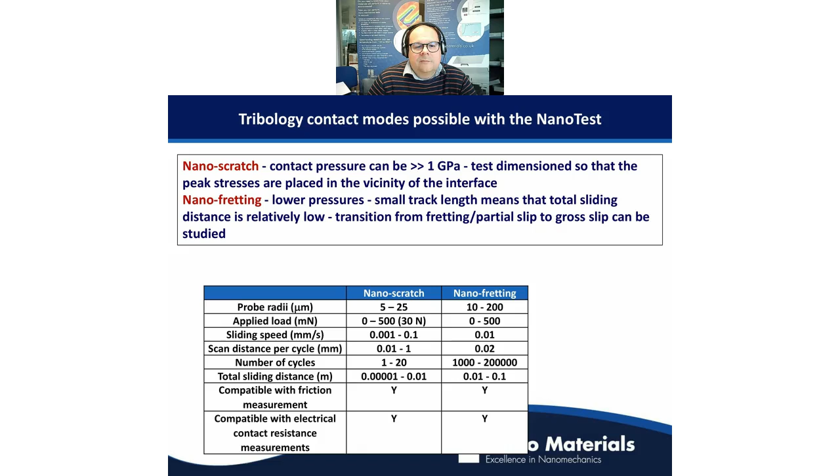We also have the nanotribometer test, which is also a reciprocating technique like fretting, but critically over a longer scan distance - 1 to 10 millimeters would be typical, though we can go up to about 40 millimeters, using the same type of load ranges but larger tip radius probes. This is more of a wear type test, essentially like a slightly scaled down, more conventional reciprocating tribometer test. We measure friction as well as probe depth, and other secondary and tertiary signals, such as electrical contact resistance at the interface of the probe and sample.

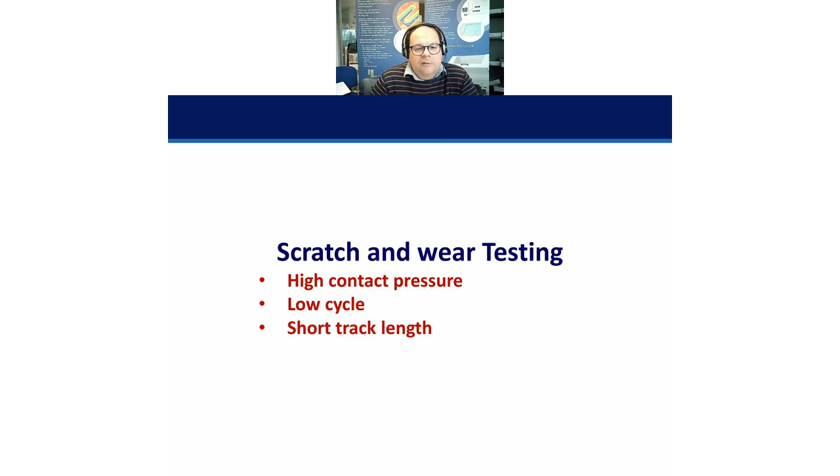So scratch and wear testing involve high contact pressure, a small number of cycles, and short track length. Here are some micrographs - these are ramped load scratch tests, with 5 repeat tests scratched in this direction across the sample. You can see a little bit of plastic deformation up until this point, where you get this great big delamination of the coating. Remember, we position a stress maximum so we can actually fail the interface of the coating and the substrate. That's a single pass ramped load, or increasing load, scratch test.

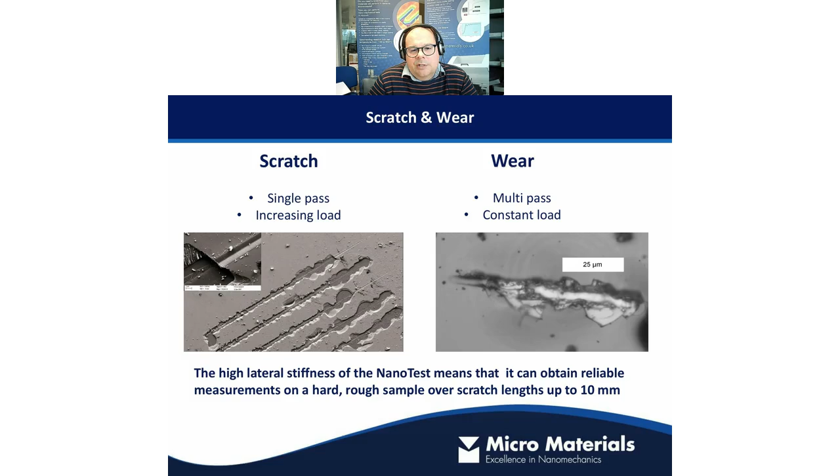Another type of test we'd call a scratch test is a multiple pass wear test, where we scan over the same path multiple times using the same subcritical load. Subcritical means a load which would not drive a failure in a single pass. So what type of things can we do with those?

This is an example of a 3-pass scratch test on a thin tetrahedral amorphous carbon film on a silicon wafer. For the first scan, we scan along our intended scratch path with a low contact load, maybe something like 0.1 of a millinewton, to produce a topography of our initial sample surface.

Then we do our ramped load scratch pass. As the load increases, the depth increases, and we can see at a certain point an event occurs. At this point we don't really know what that event is - you can see something's happened, but we need to wait until completion of the test to get a full picture. So the final pass, the third pass, is another low load topography - one before the loaded pass scratch, and one after. This line here is our post-scratch topography.

When we've got all those data sets together on one chart, we can pick out events and match that up with our microscopy. We've got our big event here, which we saw during the loaded pass scratch, and we can see a corresponding big step in our post-scratch topography. That's basically complete film removal - the sample is destroyed at this point. We've gone through the coating and we're now down to the silicon substrate.

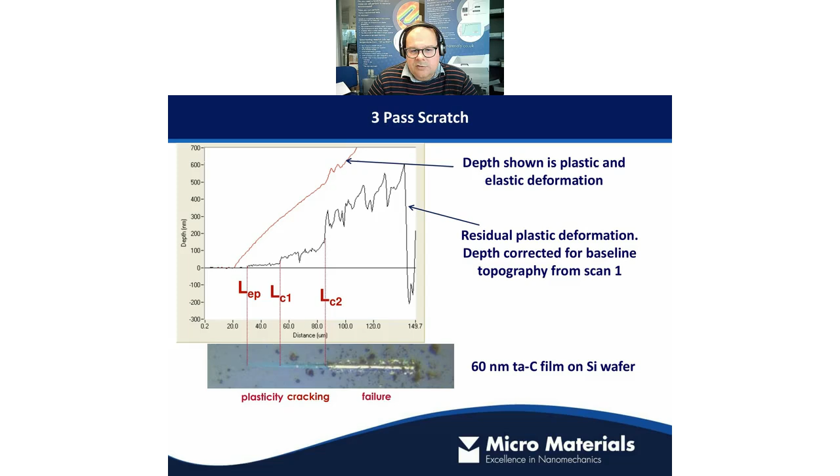So that's what a ramped load scratch test looks like. Along with this, we would also have a friction data set as well, and we would certainly see at this point some quite major events in the friction signal. So you can combine ramped load scratch testing with other techniques as well, other instrumented signals.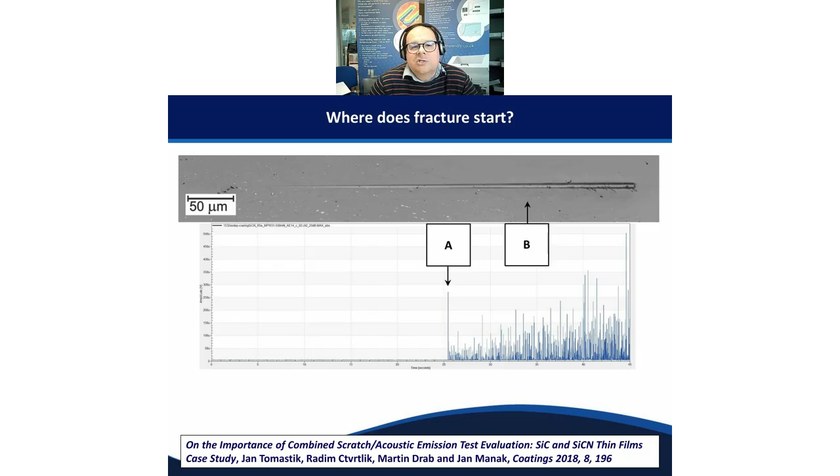So you've got a range of instrumented signals that you can use in conjunction with one another to get a full picture on what happens during your scratch test.

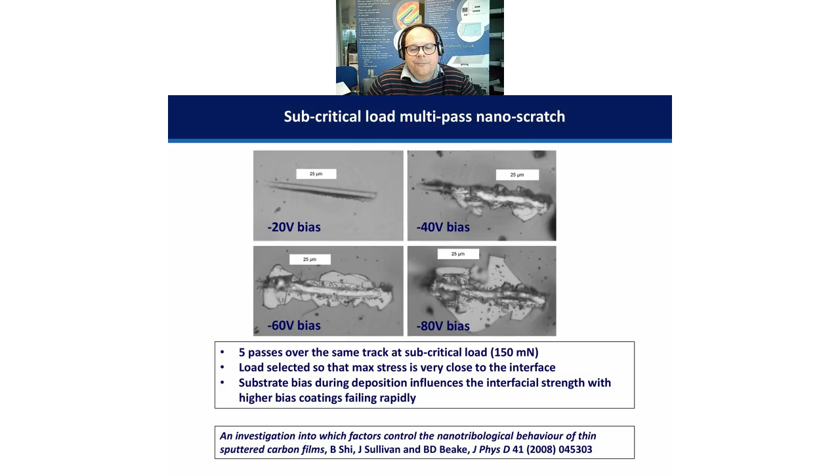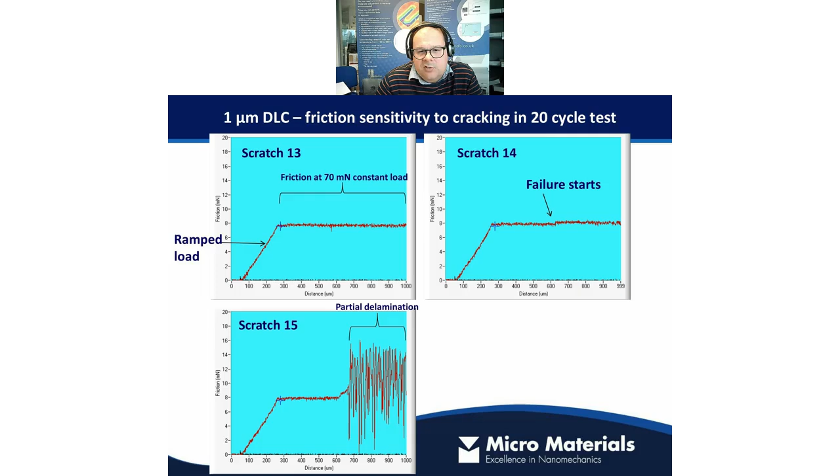When we then look at scratch 14, we see a small step in friction, maybe an additional quarter of a millinewton force acting on the probe there. That could be something or nothing at this point, but let's go to scratch 15. Oh, well, it's developed. So now we've got a major failure commencing. We've got delamination, a partial delamination of the coating from the substrate, and by scratch 16, the whole track is destroyed.

And so we can actually produce quite nice wear evolution charts in terms of mean depth of the probe versus scratch cycle number for multiple different samples, and compare how well they perform in a sliding scenario.

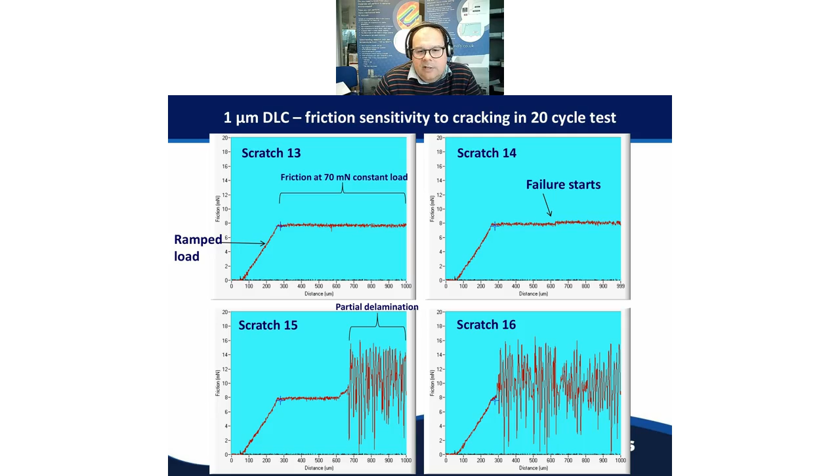So moving away from scratch, moving to fretting, as I said before, it's more cycles, a greater number of cycles, so thousands to tens or even hundreds of thousands of cycles, small amplitude, and critically, a much lower contact pressure as well. So this gives you an idea of what we're talking about here.

This technique called nanofretting fills the gap between AFM-based tribo testing, which is a valuable technique but does reach limitations when you get to coatings much more than a few tens or hundreds of nanometers thick, and conventional tribometers which work at a scale that's too large. So fretting techniques drop nicely into that gap where previously there wasn't a suitable instrumented technique.

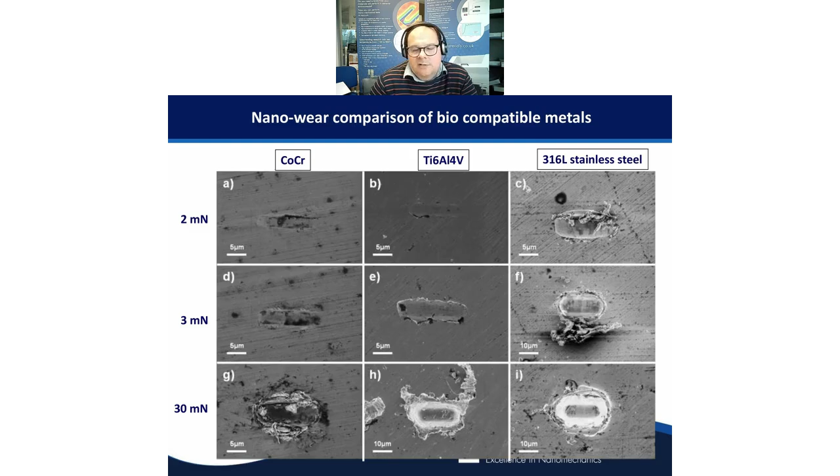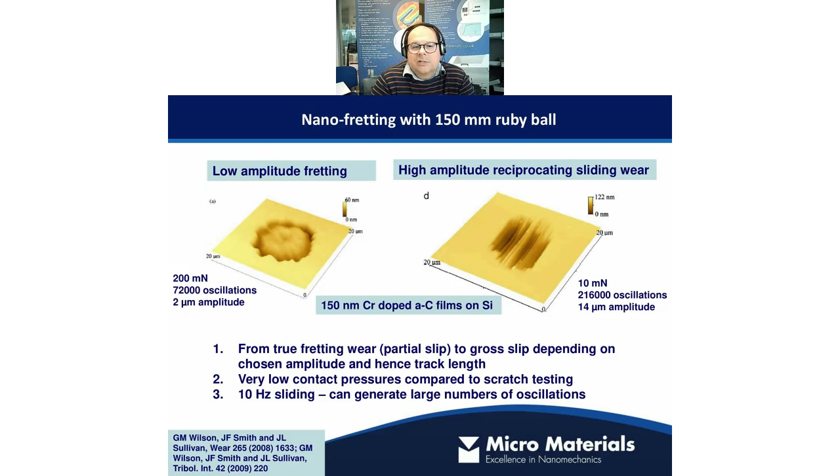An interesting point is an amplitude where you get some sliding but don't fully expose the wear track, and you can end up with trapped debris, which works as extra abrasive particles. You get this kind of third body erosion type test, which accelerates wear rates further. So you can simulate a large number of real world conditions by adjusting your test conditions accordingly.

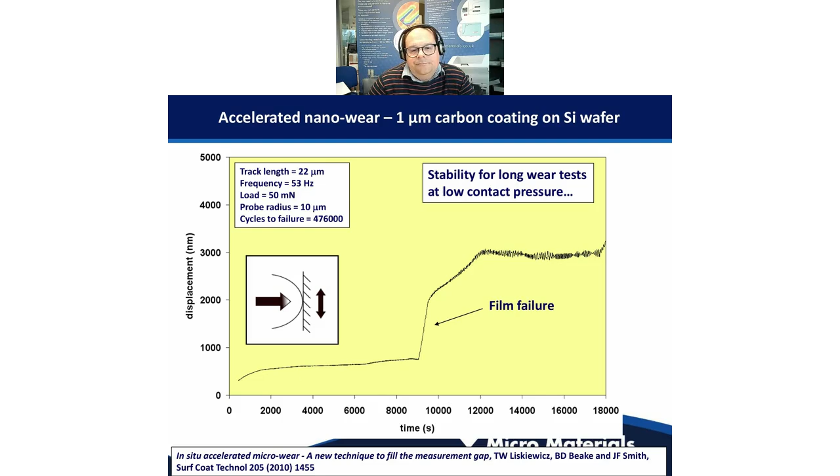So the nanotribometer test, this is the final one of the techniques I wanted to introduce. Lower contact pressure, medium cycle counts - tens, hundreds, maybe a few thousand cycles. We're certainly not going to hundreds of thousands of cycles, and a larger oscillation amplitude.

We are able to combine that with additional techniques. So we could even do this in a fluid. We could do this with, for example, the sample being an electrical connector, and we could pass electrical charge between the probe and the sample and look at how the electrical contact resistance changes as the test progresses.

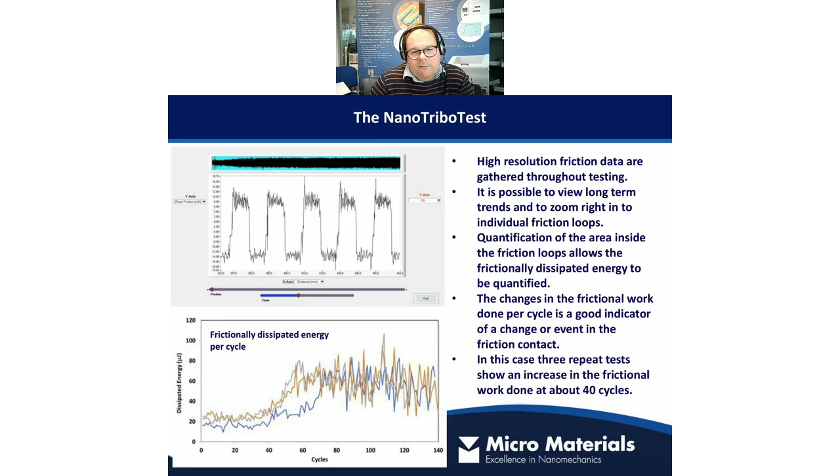You can see from that point on, potentially, the frictionally dissipated energy is gradually dropping again, as the original surface of the material has been removed, worn away, and we're now deeper down into the sample. We're potentially now polishing a little bit that contact, and consequently the frictional force is reducing, the frictionally dissipated energy per cycle is reducing as well.

As I said, we can combine this type of technique with additional signals. So what we've actually done here is we've used an electrical connector, and we've used an electrically conductive probe. We've asked our electrical contact resistance system to maintain a fixed current flow between the probe and the sample - we could say, I want you to flow 0.1 amps, for example, between the indenter and the sample, and I want you to vary the voltage to keep that current flow constant.

So these are useful for things like sliding electrical connectors of the type, for example, that you might use to charge up a mobile phone. I think we've probably all had the experience of, after some time, some unreliable contacts between our phone charging cable and our phone. Basically, in most cases, that's due to the external highly conductive, usually gold layer on those contacts wearing away.

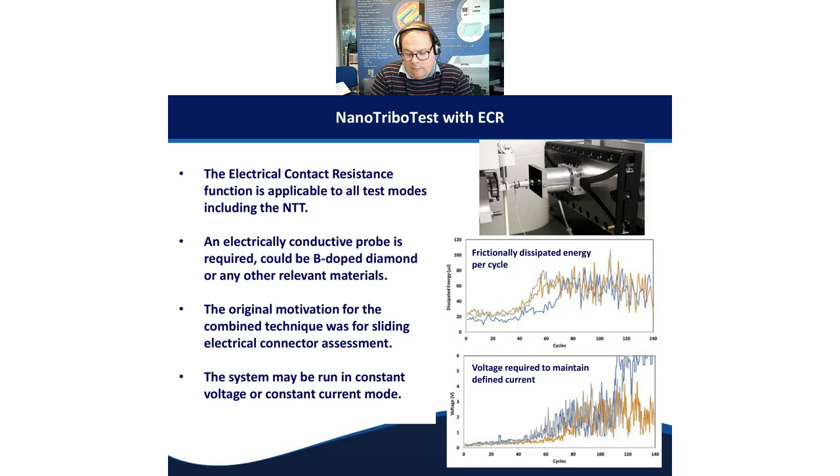Just to mention, in terms of probes, we can use whatever we want, so long as it's electrically conductive for these tests. You could use a boron-doped diamond indenter - standard diamond is not electrically conductive, but boron-doped diamond is available and that is conductive. Or you could use metallic probes - the system is very flexible in terms of what you can use as a test probe. So if you have a very specific tribo system you want to replicate on the instrument, that is possible, more so than on some competitive instruments.

It's worth mentioning there is a micro-nanoscale pin-on-disc tribometer as well, which works in a similar way, except that the sample actually rotates rather than sliding backwards and forwards.

I just want to show one more slide about performing tests in application-specific environments and other compatible techniques. I rather hoped this would come up as an animation, but unfortunately the platform we're using doesn't easily allow that. Of course, we can perform tests at elevated temperatures - not all tribo systems work at ambient temperatures, so we can increase our sample and probe temperatures to suit the reality we're trying to replicate at lab scale. We can drop the temperatures as well.

We can create potentiostatically controlled or galvanostatically controlled corrosion cell or plating type environments using a potentiostat or galvanostat in a liquid environment, so we have liquid cells available. Of course, the liquid cell can also be used without the potentiostat or galvanostat, perhaps to provide, in a bio application, submersion of samples in synovial fluid or something like this. That's possible. You could potentially also perform tests in an oil lubricant or something like that, depending on what's appropriate for your reality.

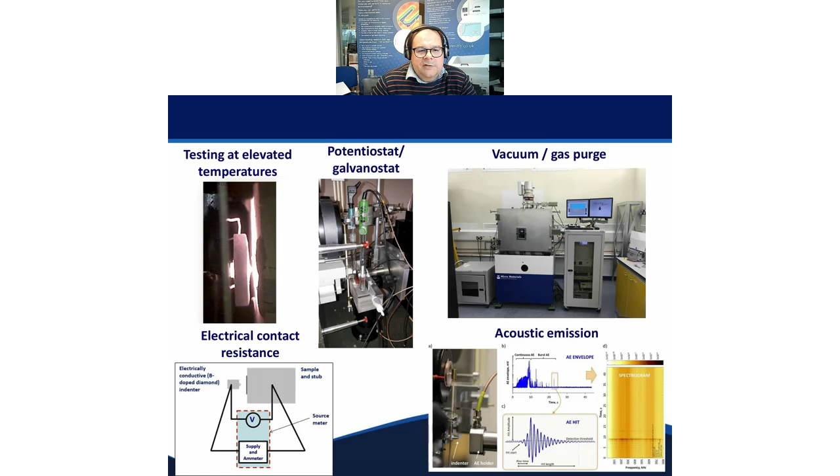We mentioned the acoustic emission system as well - a very highly sensitive system which enables us to get an earlier view on the earliest onset of failures. And of course we mentioned this electrical contact resistance system, which uses a source meter system to maintain either a fixed voltage or fixed current across the contact of the indenter and the sample.

So in summary, nano and microtribology gives us access to things not accessible from traditional tribology techniques. We get more than just how long it takes for something to fail. Particularly with scratch testing, we can actually look at what is the first thing to happen - what's the origin of the failure? Is it a cohesive breakup of a coating, or an adhesive failure between the coating and substrate, etc. We can learn a lot of things we can't learn from traditional techniques.

The Nanotest instrument offers a really wide range of techniques which we can engineer very easily - meaning we can specify probe materials, probe dimensions, contact pressures, etc. We can engineer and design tests very quickly and easily to replicate a very wide range of nano and microtribological scenarios. It's multi-technique, multi-environment, and multi-scale. So not a completely exhaustive insight, but hopefully an introduction to the existence of these techniques.

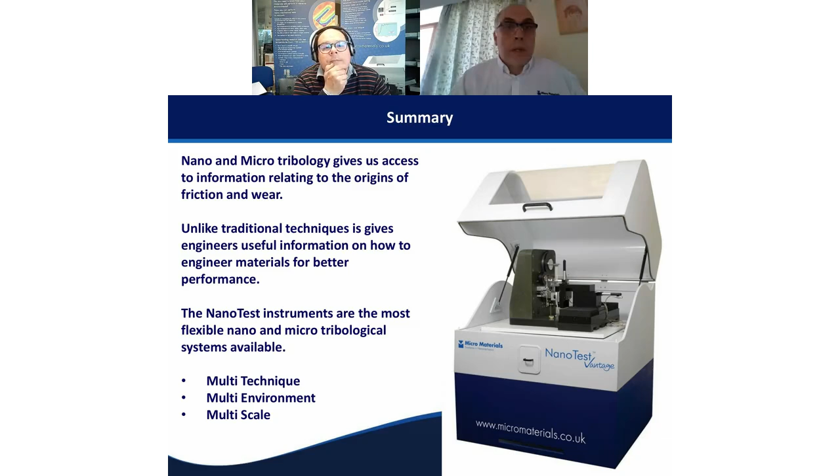Thank you, Adrian. Appreciate that. I suggest we now go through all of the questions that we got. My camera's now off again for some reason. I can see you - can you see me? I can't see - yes, you're there. Okay, yeah, good job, I'm behaving myself then, I guess. Ben's with you as well.